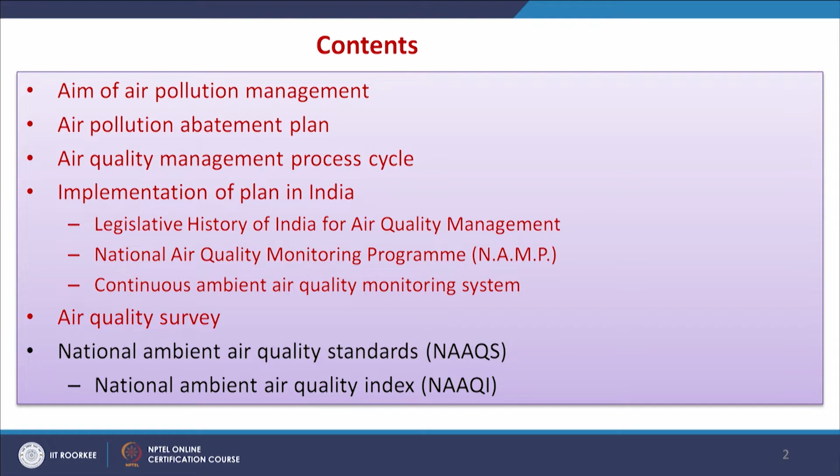Hello everyone, now we will discuss the topic air pollution management, air quality survey, national ambient air quality index, part 1. The contents are aim of air pollution management, air pollution abatement plan, air quality management process cycle, implementation of plan in India, that is legislative history of India for air quality management, national air quality monitoring program, continuous ambient air quality monitoring system, air quality survey, and national ambient air quality standards and national ambient air quality index. These will be the contents of discussion in 2 classes; in the first class we will cover up to air quality survey, and in the second class we will discuss these 2 items.

Now, we will see what is the aim of air pollution management. Certainly there are some objectives. Air quality management is necessary to ensure the quality of ambient air, so that it will not create health impacts on the residents, or impact the plants or the cultural aspect of the society, etc.

Air pollution management aims at the elimination or reduction of airborne gaseous pollutants, suspended particulate matter, physical and to a certain extent biological agents whose presence in the atmosphere can cause adverse effects on human health, that is irritation, increase of incidence or prevalence of respiratory diseases, morbidity, cancer, excess mortality, or on welfare like sensory effects, reduction of visibility, deleterious effects on animal or plant life, damage to materials of economic value to society, and damage to the environment, that is climatic modifications.

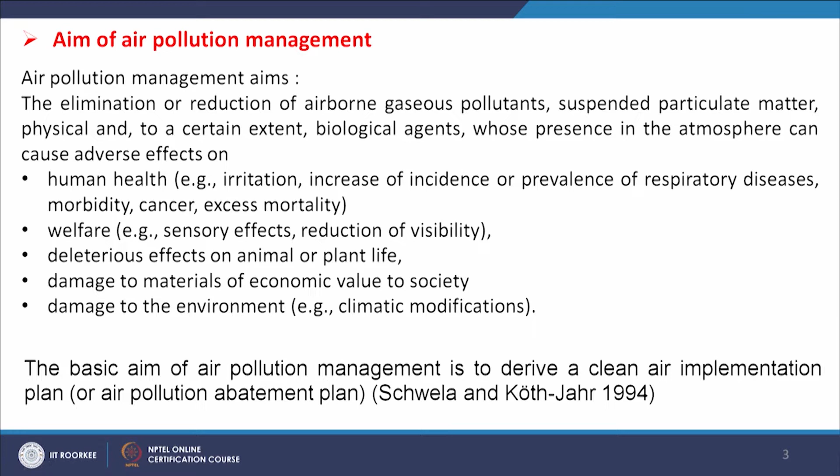These are the main objectives of air pollution management, and the basic aim of air pollution management is to derive a clean air implementation plan, or we can say air pollution abatement plan. So, what is an air pollution abatement plan? It consists of many elements such as description of the area with respect to topography, meteorology and socio-economy. We are targeting a particular area where we are developing this air pollution abatement plan.

Then we need to develop the emission inventory, so the emissions inventory is important. Then comparison with emission standards: what are the emission levels and how they are with respect to standards, we have to know first. Then air pollution concentrations inventory and simulated air pollutant concentrations. From source to ambient air, how the distribution is taking place, we can model it and compare the value with the existing ones and with the standards as well. So, comparison with air quality standards.

Inventory of effects on public health and environment. We need to do the background work to identify the effects of environmental parameters on public health. Causal analysis, how many casualties are taking place because of this, and control measures and cost of control measures. What can be the control measures and what will be the cost associated with each has to be known first, so that the abatement plan can work. And cost benefit analysis, cost of control versus cost of effects, is also necessary.

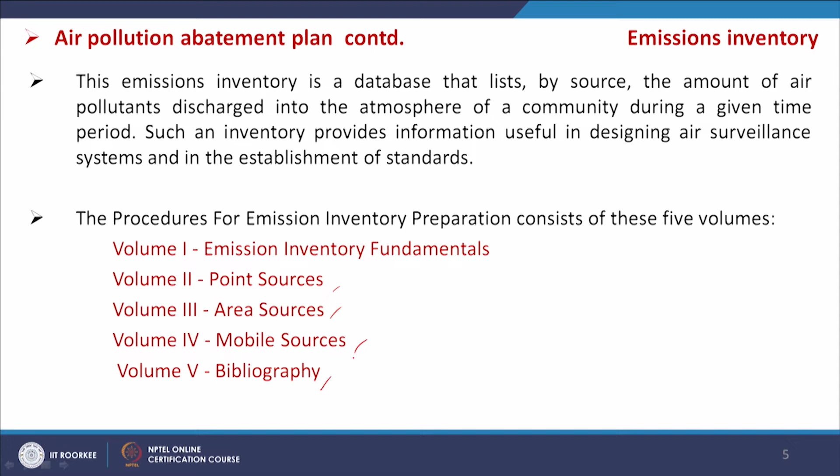Now, we will discuss in detail some of these factors, like emission inventory. An emission inventory is a database that lists by source the amount of air pollutants discharged into the atmosphere of a community during a given time period. Such an inventory provides information useful in designing air surveillance systems and in the establishment of standards. The procedures for emission inventory preparation consist of 5 volumes: volume 1 emission inventory fundamentals, volume 2 point sources, volume 3 area sources, volume 4 mobile sources, volume 5 bibliography. Volume 1 contains the fundamental aspects; it is a guide to the managerial and technical aspects of the emission inventory.

It outlines the information sources available, methods of estimating emissions, data validation and quality assurance techniques, as well as procedures to maintain and update the inventory. And volume 2 discusses point source identification, then data collection, emissions calculation and data presentation. It establishes standardized methods and procedures to develop a point source database.

Similarly, volume 3 outlines the methods of collecting and handling emissions data from sources too small and/or too numerous to be surveyed individually. Collectively, these sources are known as area sources. Finally, emission factors, emission calculations, pollutant allocation and projection techniques and methods of data presentation are included to assist in the preparation and maintenance of the area source emissions inventories.

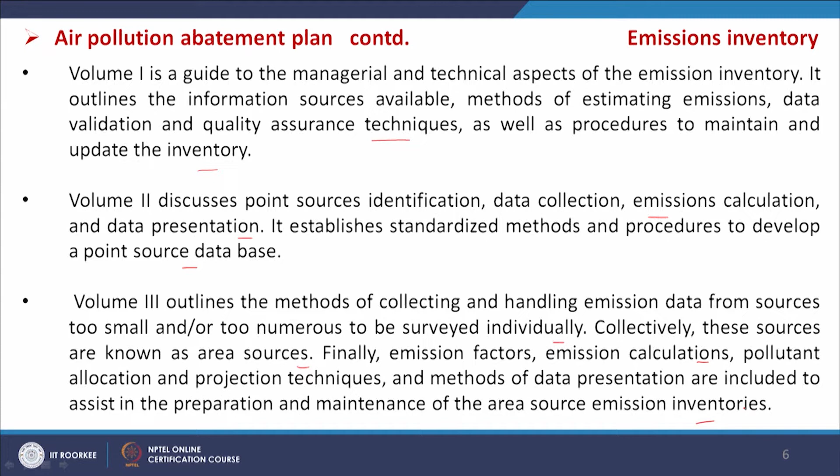So, that is related to volume 3, and volume 4 presents an overview of the mobile source category, and volume 5 presents an extensive listing of currently available reference material designed to assist in the development of an emission inventory. So, those are the resources from which the inventory analysis takes place.

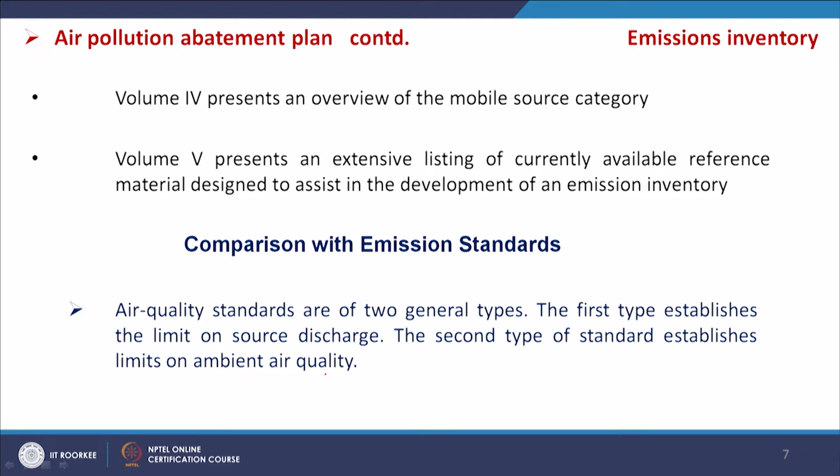So, another point was comparison with emission standards. Air quality standards are of two general types. The first type establishes limits on source discharge; the second type establishes limits on ambient air quality. So, what emission is coming out from industrial or vehicular sources, that is one standard, and in ambient air, what concentration of different pollutants is permissible, that is another type of standard. We have already discussed it in our previous classes.

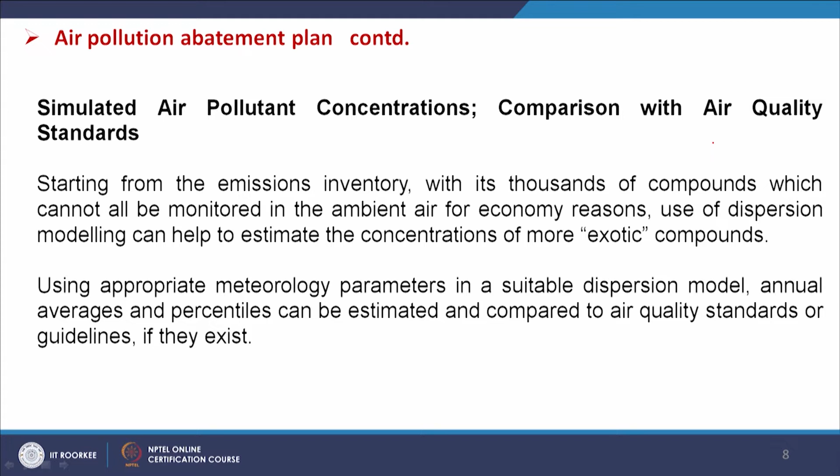Now, simulated air pollutant concentrations comparison with air quality standards. A number of pollutants may be emitted from different sources and those will be distributed into the ambient air. So, it is needed to develop some dispersion models and predict the concentration of the pollutants present in the ambient air, and we can get some real life data and compare with that. So, this comparison is also one important method for the development of this plan. It helps us to take corrective actions. And controlling measures of air pollution.

So, the atmosphere has several inbuilt cleaning processes, such as dispersion, flocculation, absorption, rain washout, etc., to cleanse the atmosphere. As we have discussed in the introductory classes, there are some cyclic processes in nature that make the environment clean, revitalize it and can take some pollution load up to a certain level. So, in air also, some natural methods are there for the removal of pollutants. However, control of contaminants at their source level is a desirable and effective method through preventive or control technologies. So, when pollutants are being generated, our first principle will be to reduce those emissions.

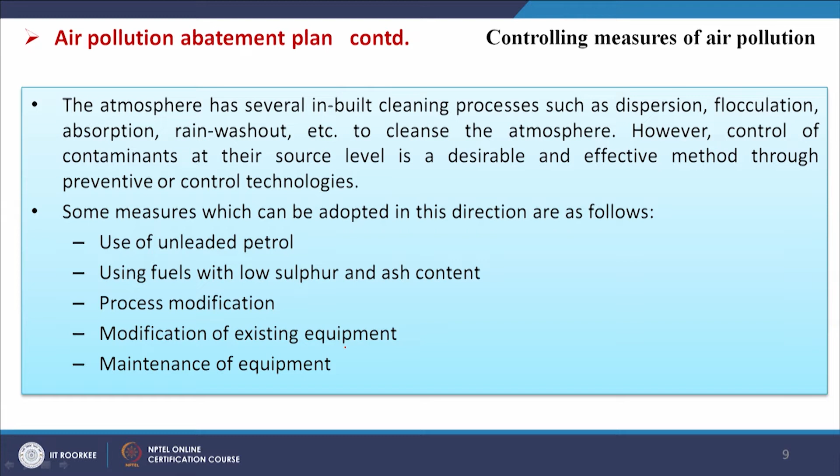Some measures which can be adopted in this direction are as follows: use of unleaded petrol in vehicles, using fuels with low sulfur and ash content, process modification in industries, modification of existing equipment and maintenance of equipment. That is applicable for cars and all vehicles also. And controlling measures of air pollution in industrial establishments can be done through control of gaseous pollutants and control of particulate pollutants.

We have already made detailed discussions on all these methods, like absorption by liquids, adsorption by solids and combustion, and gravitational settling chambers, cyclone separators, fabric filters, electrostatic precipitators and wet collectors or scrubbers. We have made detailed discussions on this topic.

Now, vehicle emissions can also be controlled. Control measures for vehicle emissions are adequate and efficient mandatory inspection and maintenance programs enforced for the existing car fleet, enforcement of the use of catalytic converters in new cars, aggressive substitution of solar or battery powered cars for fuel powered ones, regulation of road traffic and transportation, and land use planning concepts. These are some aspects of controlling vehicular emissions.

Apart from that, motor vehicle emissions are controlled by controlling emissions per vehicle mile travelled and by controlling VMT, that is vehicle miles travelled. Emissions per VMT can be reduced by controlling vehicular performance and hardware maintenance of both new and in-use cars.

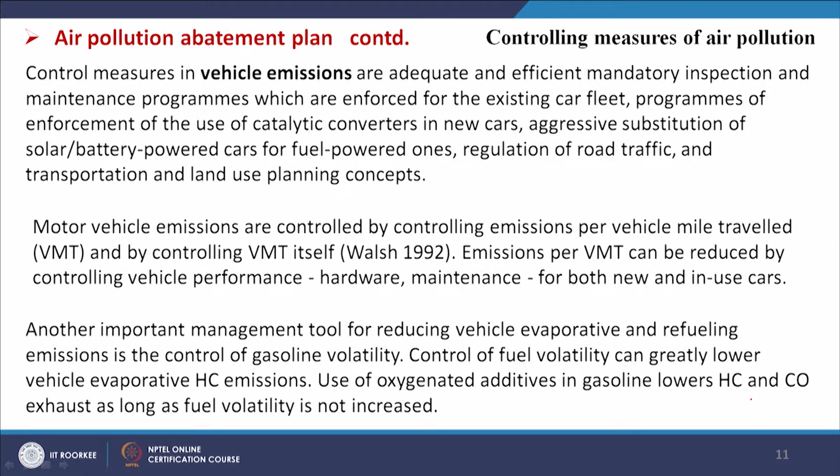Cost of public health and environmental effects, cost benefit analysis. So, these are very typical cases and not so simple. The estimation of the cost of public health and environmental effects is the most difficult part of a clean air implementation plan, and it is very difficult to estimate the value of the lifetime reduction of disabling illnesses, hospital admission rates and hours of work lost.

However, this estimation and a comparison with the cost of control measures is absolutely necessary in order to balance the cost of control measures versus the cost of no such measure undertaken in terms of public health and environmental effects. So, for this the involvement of all stakeholders is necessary, and the survey is also necessary.

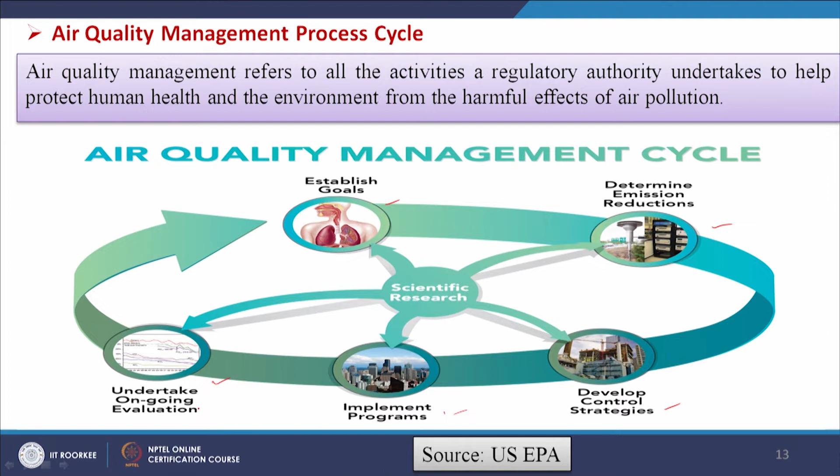So, a government institution typically establishes goals related to air quality. An example is an acceptable level of a pollutant in the air that will protect public health, including people who are more vulnerable to the effects of air pollution. So, this is our selection of the goal. Then air quality managers need to determine how much emissions reductions are needed to achieve the goal. Air quality managers use emissions inventories, air monitoring, air quality modeling and other assessment tools to understand the air quality problem fully.

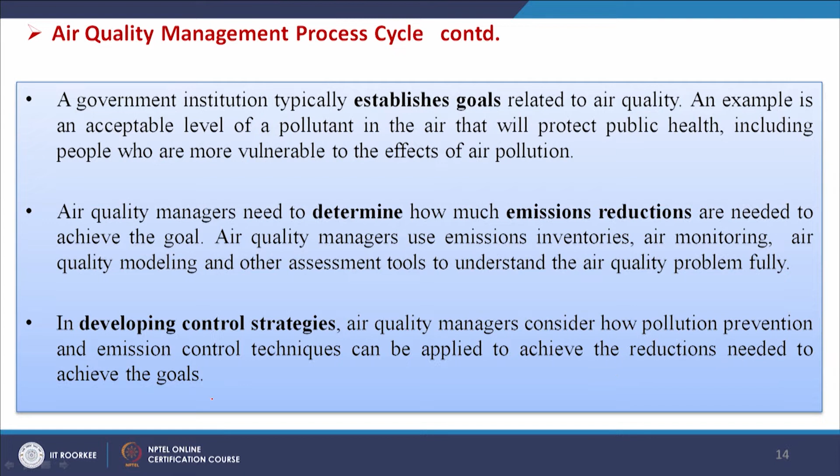In developing control strategies, air quality managers consider how pollution prevention and emission control techniques can be applied to achieve the reductions needed to achieve the goals. To successfully achieve the air quality goals, air quality managers need to implement programs for pollution control strategies; regulations or incentive programs that lower emissions from sources need to be put in place. Regulated industries need training and assistance in how to comply with rules, and the rules need to be enforced.

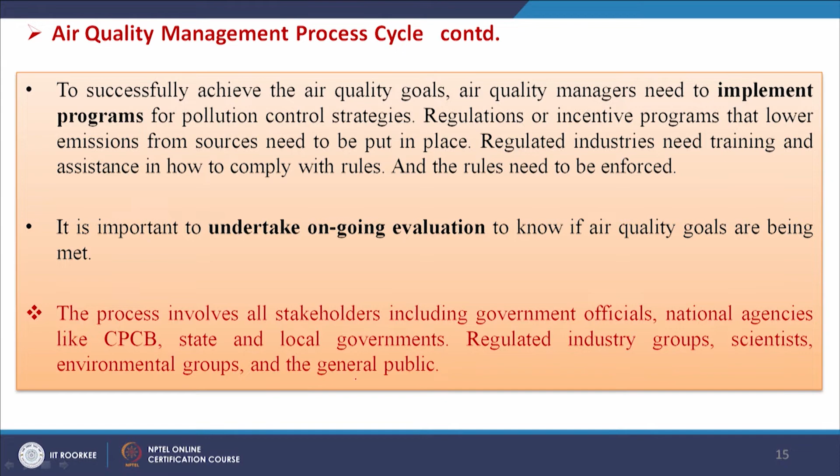And it is important to undertake ongoing evaluation to know if air quality goals are being met. The process involves all stakeholders including government officials, national agencies like CPCB, state and local governments, regulated industry groups, scientists, environmental groups and the general public. Now, we will see implementation of plan in India. So, we see the legislative history of India for air quality management.

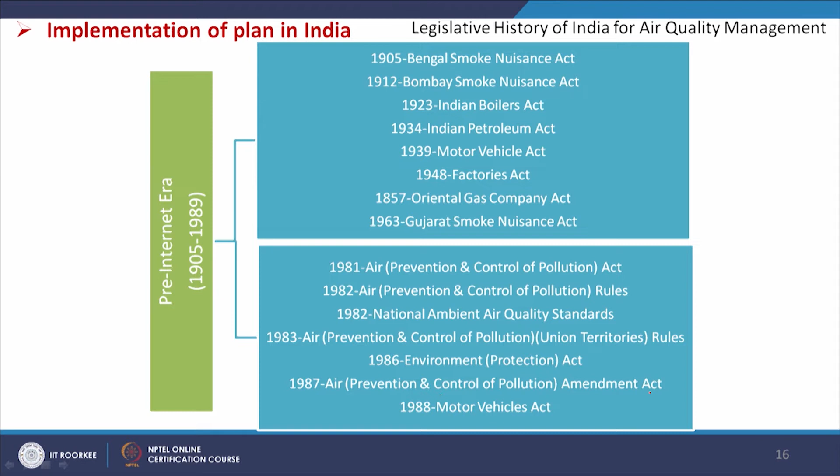So, pre-internet era, 1905 to 1989. In 1905 the Bengal Smoke Nuisance Act, then 1912 Bombay Smoke Nuisance Act, 1923 Indian Boilers Act, 1934 Indian Petroleum Act, 1939 Motor Vehicle Act, 1948 Factories Act, 1857, that is very old, Oriental Gas Company Act, 1963 Gujarat Smoke Nuisance Act, 1981 Air (Prevention and Control of Pollution) Act, 1982 Air (Prevention and Control of Pollution) Rules, 1982 National Ambient Air Quality Standards, 1983 Air (Prevention and Control of Pollution) Union Territories Rules, 1986 Environmental Protection Act, 1987 Air (Prevention and Control of Pollution) Amendment Act, 1988 Motor Vehicles Act, 1994 Environmental Impact Assessment Notification.

So, this is the transition era, 1990 to 1999: 1994 Environmental Impact Assessment Notification, 1994 Revised Air Quality Standards, 1995 National Environmental Tribunal Act, 1997 National Environmental Appellate Authority Act, 1998 establishment of the Environmental Pollution Control Authority. And then the internet era, 2000 to 2020: 2006 Environmental Impact Assessment Notification, 2009 National Ambient Air Quality Standards, 2010 National Green Tribunal Act, 2017 Graded Response Action Plan, 2019 Motor Vehicle Act, 2019 National Clean Air Program and 2020 Commission for Air Quality Management.

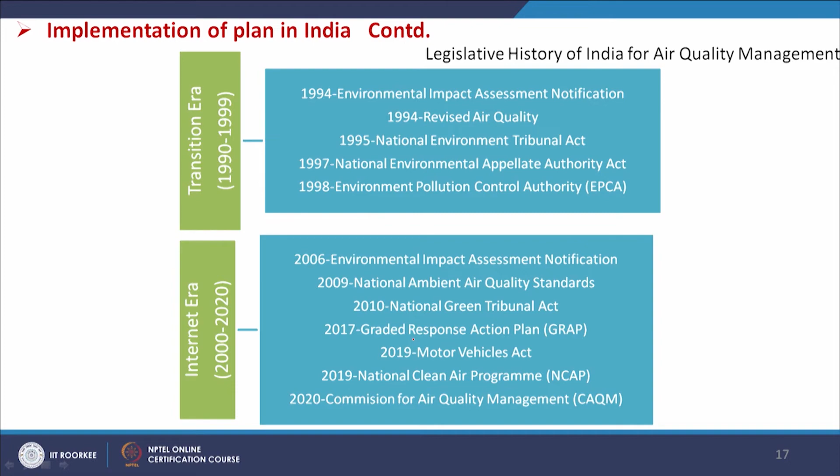So, significant efforts have been put to control or manage the air quality in the country. And now, we will see the National Air Quality Monitoring Program. This is one important program which the Government of India has implemented, and monitoring air quality is a mainstay component of air quality management as it allows informed decision making. So, this National Air Quality Monitoring Program helps to take decisions.

The government uses its air monitoring data to determine if air quality is meeting national standards, determine the highest pollutant concentrations, understand how pollutants behave and their relationship with the weather, validate pollution modeling used to test scenarios and forecast air quality, evaluate the effectiveness of air pollution control programs, evaluate the effects of air pollution on public health, track the progress of plans for meeting air quality standards, determine air quality trends, and develop responsible and cost effective pollution control strategies and policy decisions.

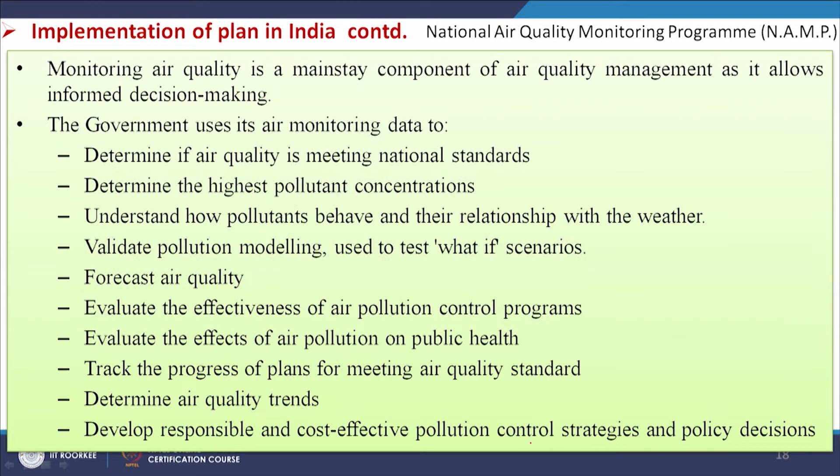Now, Central Pollution Control Board initiated the National Ambient Air Quality Monitoring (NAAQM) program in the year 1984 with 7 stations at Agra and Anpara. Subsequently, the program was renamed as National Air Quality Monitoring Program. Steadily the air quality monitoring network got strengthened. In 2019, the number of stations was raised to 804, covering 344 cities, towns or villages in 28 states and 6 union territories as on 31st December 2019.

So, Central Pollution Control Board initiated the National Air Quality Monitoring Program, as mentioned earlier, under which 3 air pollutants, that is sulfur dioxide, nitrogen dioxide and particulate matter of size equal to or less than 10 micron, have been monitored regularly at all the locations. So, this is the initial stage. Other parameters like PM2.5, particulate matter having an aerodynamic diameter less than or equal to 2.5 micrometer, carbon monoxide, ammonia, lead, ozone, benzene, benzopyrene, arsenic and nickel are being monitored at selected locations and are slowly being added to the monitoring network under NAMP, the National Air Quality Monitoring Program.

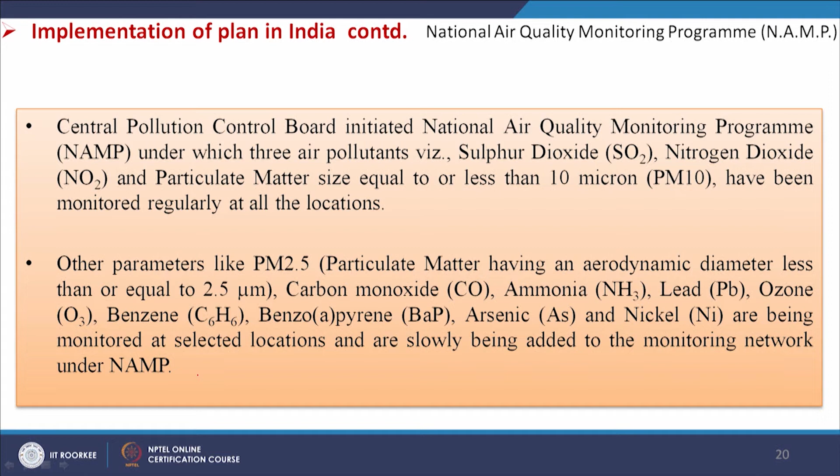Now, the monitoring of regular parameters is carried out for 24 hours, 4 hourly sampling for gaseous pollutants and 8 hourly sampling for particulate matter, with a frequency of twice a week to have 104 observations in a year. This information is already provided in the ambient air quality standard we discussed in our earlier classes.

The monitoring under the NAMP is being carried out with the help of state pollution control boards, pollution control committees, National Environmental Engineering Research Institute Nagpur, Central Pollution Control Board head office and its regional directorates, IIT Kanpur and other institutes of repute. CPCB coordinates with these agencies to ensure uniformity and consistency of air quality data and provides technical and financial support to them for operating the monitoring stations.

Now, we will see the continuous ambient air quality monitoring system. This system is also a part of the National Air Quality Monitoring Program, and a continuous ambient air quality monitoring system is a specialized system that is housed in a temperature controlled container or room and is equipped for monitoring ambient air pollutants such as SO2, NOx, CO, O3, total hydrocarbon etc., and particulate matter continuously all year round using different analyzers. It also measures wind speed, direction and other weather parameters. Mobile AQMS, that is air quality monitoring systems, can also be customized to monitor multiple sites via one system.

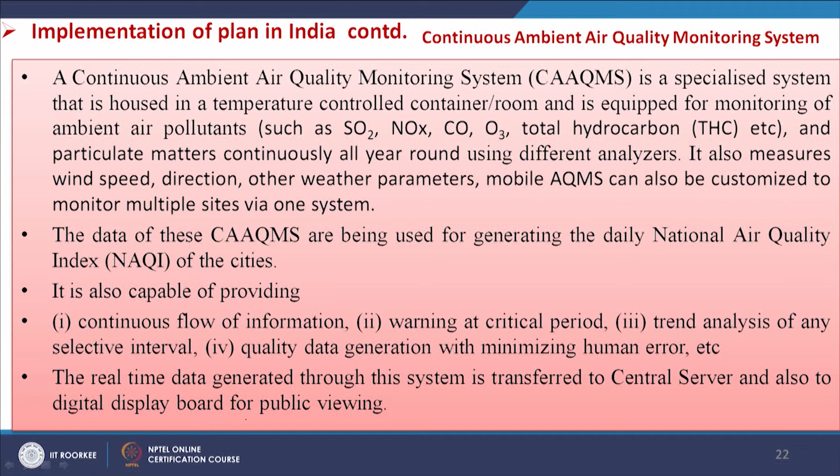The real time data generated through this system is transferred to a central server and also to digital display boards for public viewing. The pollutants which are measured using these systems I have already mentioned. As per September 2021, there are 311 stations in 155 cities and towns in 21 states and 2 union territories. Frequency of monitoring is 1 hourly for particulate matter and 15 minutes duration for other pollutants. So, as we have seen in the case of manually operated stations, the frequency is not like that of the continuous monitoring system.

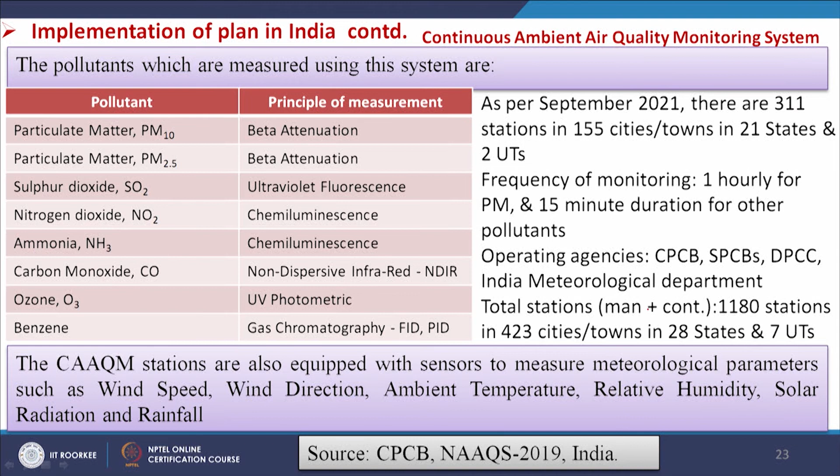Operating agencies like CPCB, SPCB, DPCC, India Meteorological Department are responsible for this, and total stations, manual and continuous, if we consider, are 1180 stations in 423 cities, towns or villages in 28 states and 7 union territories. Out of this, 311 are in the continuous system and the remaining are manually operated systems.

Now, we will discuss the air quality survey. Survey is necessary to understand the air quality, it may be indoor air or outdoor air. An investigative survey can identify the source of potential indoor air pollutants, indicators of poor air quality, ventilation system issues and more. And the methods for indoor air quality survey are interviews, site inspection or environmental evaluation.

So, interviews with the people who work in the affected site. One on one and group interviews can be conducted to get a comprehensive understanding of the situation. In site inspection, the team members may examine the workplace environment for sources of contaminants and other air issues. Samples may be collected for evaluation in the laboratory or may be measured on site. In environmental evaluation, samples are evaluated for bioaerosols and other biological components. If any tests have positive results, remediation measures are taken.

Due to this indoor air quality survey, we can get some advantages, that is safety. The IAQ surveys will identify potential health hazards or rule them out to maintain a safe workplace. Staff morale: resolving issues such as odors, allergies and diseases will improve employee morale by creating a more comfortable place to work. And compliance: an IAQ survey will pinpoint possible ventilation and containment issues that can be resolved to stay compliant with government regulations.

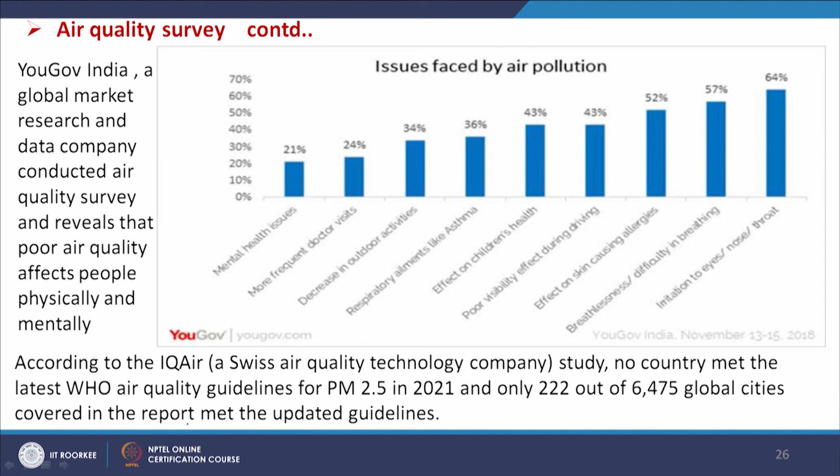And according to IQAir, a Swiss air quality technology company, as per the IQAir study, no country met the latest WHO air quality guidelines for PM 2.5 in 2021, and only 222 out of 6,475 global cities covered in the report met the updated guidelines. So, this is another air quality survey report by an international agency.

Now, we will see the WHO air quality database. WHO is also collecting data and preparing a database on the basis of which decisions can be taken. The WHO air quality database compiles data on ground measurements of annual mean concentrations of particulate matter and nitrogen dioxide. The primary source of data includes official reporting from countries to WHO, official national and subnational reports, or national institutes or governmental websites. Additional sources include other UN agencies, other development agencies, peer reviewed journal articles, regional networks such as air quality e-reporting from the European Environment Agency for Europe, and ground measurements compiled in the framework of the Global Burden of Disease project.

The database is updated regularly every 2-3 years since 2011. The data compiled in this database is used as input to derive the sustainable development goal indicator 11.6.2, that is air quality in cities, for which WHO is the custodial agency. The fifth WHO air quality database, the largest of its kind, covers over 6,000 cities or human settlements in 117 countries and indicates where air pollution levels and the related health risks are higher. So, we see that air quality management is a very important aspect, and at both national and international level many efforts are going on to manage environmental air quality.